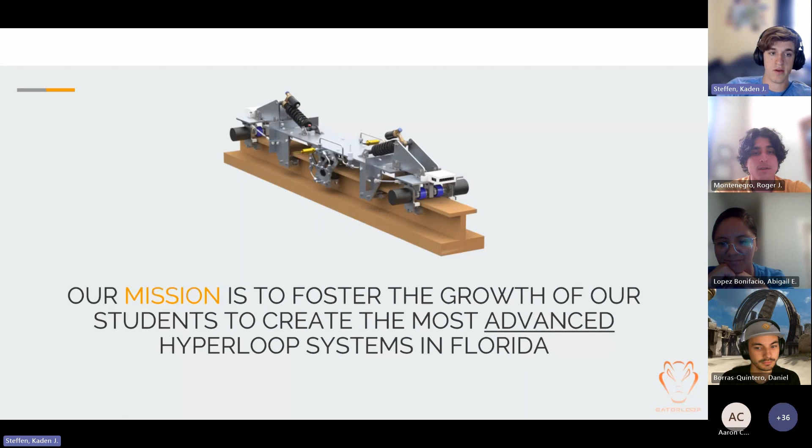I'm the Brake Sub Team Lead, and we're gonna give you a rundown of our previous version of our pod, TinyPod, which we are wrapping up. Like I said, we'll give you a quick overview and then progress on our electrical subsystem, and then we'll also give an insight into our next project that we're working on, which is upscaling this previous version of the pod.

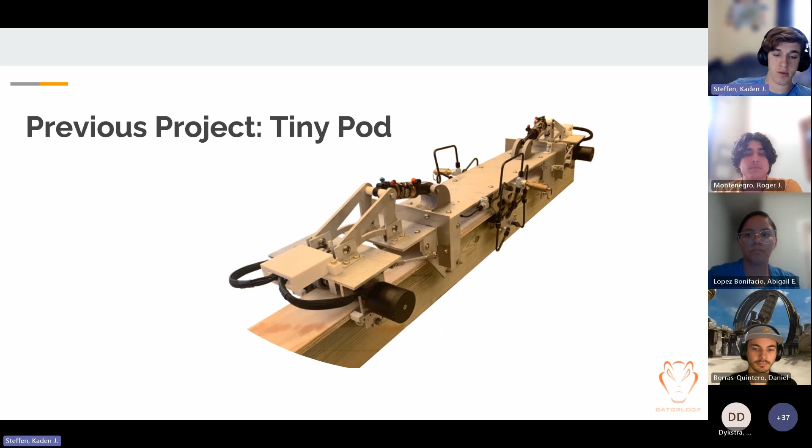So we will start off with our mechanical subsystems, and first off, powertrain. Hi, so I'm Daniel Borras. I am powertrain sub-team lead, and the previous generation what we had was basically just a brushless motor with a wheel to propel the system. So as you can see in the CADs above, you can see the general structure of how we designed the powertrain subsystem. And then you could actually see the brushless motors with the wheels attached to it. So that's the main system that we had to propel it.

So to make sure that the wheels were always in contact, we also made sure to add what we decided to call a constant friction applier. So what we call the under friction system, which you could see the little wheels with the spring system there. What it basically did is make sure that the wheels that were actually being propelled by the motor were always under constant contact with the I-beam. So it always kept that pressure to make sure that we always had that constant friction so we wouldn't slide uncontrollably.

Another thing that we also decided to do is that instead of just using the two motors, we actually had a 4x4 propulsion system, which inherently provided a more stable system for the entire pod and allowed us to accelerate much more quickly while also keeping that stability of the system. We could also actively play around with the speed or the current for each motor, so we could also kind of play around with stability in that sense. But this is basically the overarching idea of what we had for the propulsion system last year.

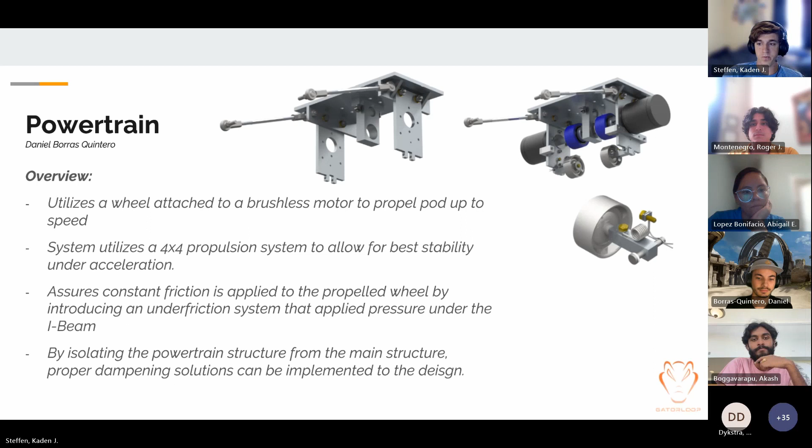Hi, I'm Roger Montenegro. I'm the stability sub-team lead. So here's a breakdown of the lateral and vertical suspension system for TinyPod. So I'll start with the lateral, which are the two top pictures right there. And we utilized an extension spring system with a pivot control arm to ensure that the TinyPod was centered on the I-beam throughout its travel. And as you can see on the left, we used FEA to try to optimize the design, but there was not much to improve there.

Now with the vertical suspension system, as Daniel mentioned, we had the powertrain motor and wheels separate from the main structure. So we utilized, again, a pivot control arm with a shock paired with that to be able to dampen out any forces or vibrations that may occur throughout its travel. And one thing that isn't really noted here is that the final product for the pivot control arms for the vertical suspension system ended up having less material towards the middle after utilizing some FEA on the structure to make sure that we were using the least amount of material. But that was basically the basic concepts that we tried to use on TinyPod's suspension system.

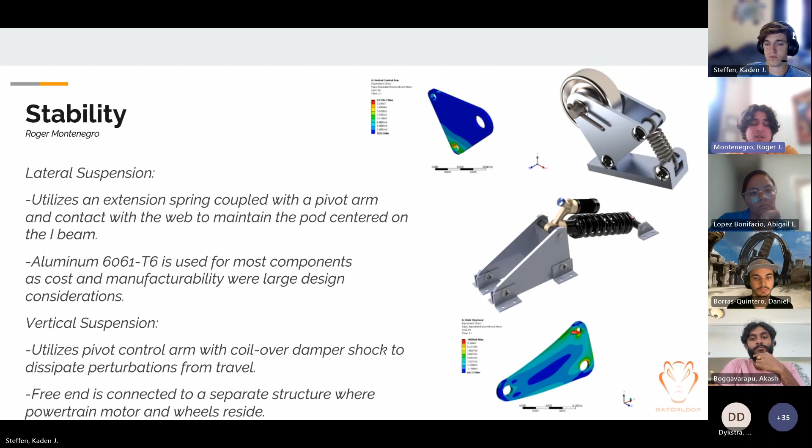Our next subsystem is brakes. So I'm Caden Steffen. I am the brake sub-team lead. Basic overview of our braking system, which you can see there on the right. It's a pneumatic braking system that utilizes a paintball tank that is housed on the top of TinyPod. We used a flange braking design with two brake pads on each side that you can see up in the top right image.

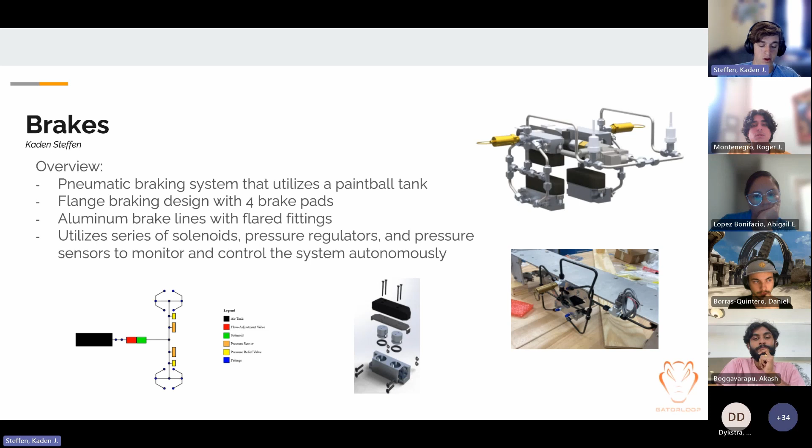The brake system itself utilized aluminum brake lines with flared fittings, and we have a series of solenoids, pressure sensors, pressure relief valves, and other various fittings, which basically allow us to monitor the pressure of our system and autonomously control it through our electrical subsystem, which we will dive into later. So I'll pass it off to structures.

Yeah, so I'm Abigail. I'm the structures lead for Gatorloop. So for TinyPod, the dimensions were just 3.5 feet times 7 inches and then 0.25 inches. The main material was aluminum, and it was just basically different plates bolted together. So really all the manufacturing processes were just milling, drilling, and a lot of the plates were made using the water jet in the university.

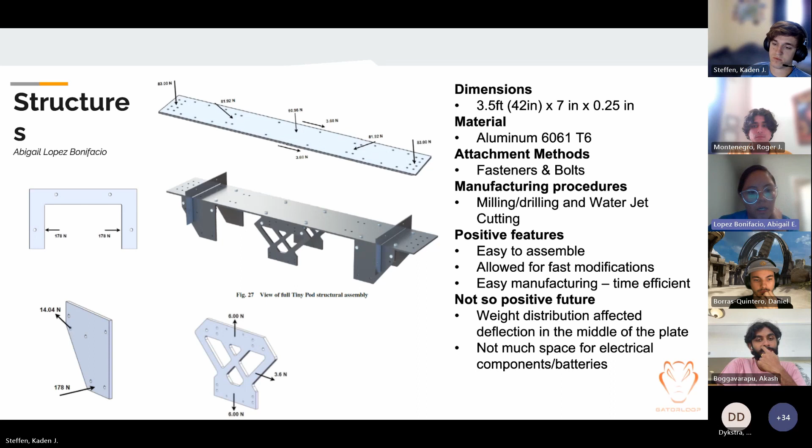The good things of TinyPod is that it was really easy to assemble. It allowed for really fast modifications, and especially regarding manufacturing time, it was fast. The not so good things is that there was not much space for some of the electrical components, and that the weight distribution was affecting the deflection of the middle plate. But yeah, that's it. All right, we'll jump into our electrical subsystems now for TinyPod.

Hello, my name is Devin Dykstra. I'm the Sensor and Systems lead. I'll be talking for Antonio because he was not able to make it.

Our battery system uses 2 separate packs made up of 41 individual cells. The main one is 10S4P for the motors and the high power systems, and then the rest of the electronics run off of a single battery, just 1S1P, which is plenty for controlling the computers and the wireless communications stuff.

The first version of our pack, as you can see pictured on the right, is just connected via copper foil, and I know this is not standard practice because it does limit how much current we can pull from it, but it does allow us to test things and very easily reconfigure the pack. Mathematically, we did check that out to run safely at 20 amps. It can probably do more, but we're limiting it to 20 amps.

And the next steps would be to actually mount it to the pod and integrate a BMS for safe operation during when we're actually driving.

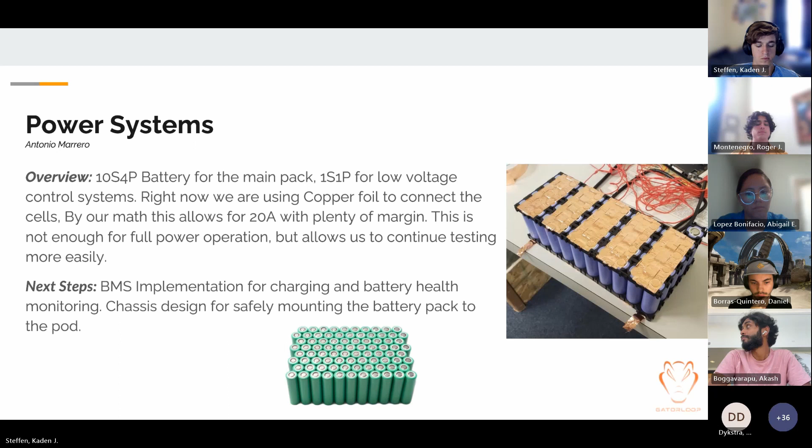Okay, and then sensor and systems, which is my actual subteam. We take a variety of sensor inputs into a Teensy 4.1 microcontroller, and then control the motors, solenoids, and LEDs appropriately. So we use an HC12 chip for the wireless module, which is a 400 megahertz transmitter. It's very low power, which means we can put it pretty much anywhere. And then also, since it's 400 megahertz, we're sacrificing transport speed for range, which is a good trade-off in our opinion, because we're not sending that much data, it's just telemetry.

And then also we have a logging system on board. So we have an SD card that we're just constantly writing to. So if anything does go wrong at any point, we're not relying exclusively on the wireless communication to log things. We also have local logging.

So what other sensors do we have? 2 pressure sensors for the braking system. The VESC, we're using that VESC just because it's a very well-documented standard for the speed controllers. It gives a bunch of data on the temperature of the motors, the speed, the power going through it, all that.

We're using an IMU to verify that the pod is actually moving how it's supposed to, so whether the acceleration matches our motor inputs, and of course if there's any lateral movement that exceeds our thresholds, then we automatically shut off and go to an emergency state. And then the ground station is just a computer with UART commands, an e-stop and a dial to control the speed. So yeah, that's the sensor systems.

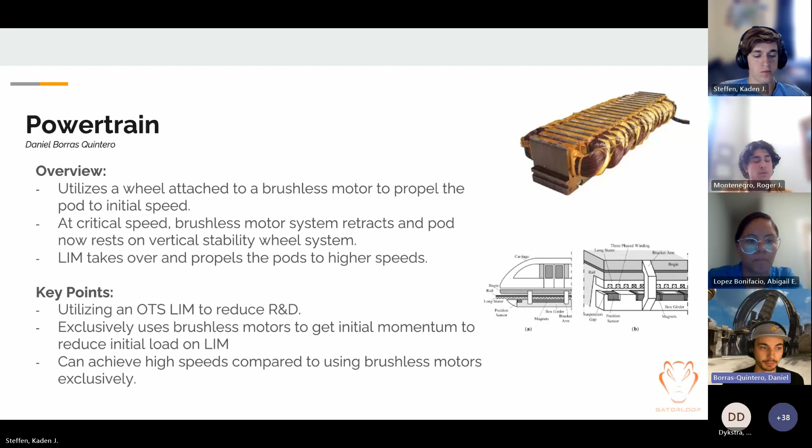So we're mainly focusing on using off-the-shelf LIM components to reduce R&D that we might need. So we're mainly looking at using an H2W high-tech LIM that they're offering, and we've been communicating with them, getting some research and documentation that they have for us to basically avoid that extra R&D, as I previously mentioned, and just generally trying to figure out how best to approach the structural problem of retracting the brushless motor train while it's still under load. So we could go on to the next page.

So what we currently have progress-wise is we've actually reviewed the horizontal vertical stability, the linear induction motor mounting system, and the lower structure sandwich, as well as the brushless motor propulsion system. We've done all the system requirement reviews, just trying to figure out what are the main objectives that we have to do for the actual project to work. And then we moved on to actually doing a decision matrix, figuring out which idea, which approach is most appropriate to actually meet those requirements that we have for that task.

So as for decision matrix review, we've already covered the horizontal vertical stability, LIM mounting, as well as brushless propulsion system. So all those teams are already moving on to the design phase, being headed by 2 or 3 engineers for each division. So hopefully we should have a final CAD model sometime around January to early February, which we'd be more than happy to show at that time. But yeah, that's current progress with powertrain.

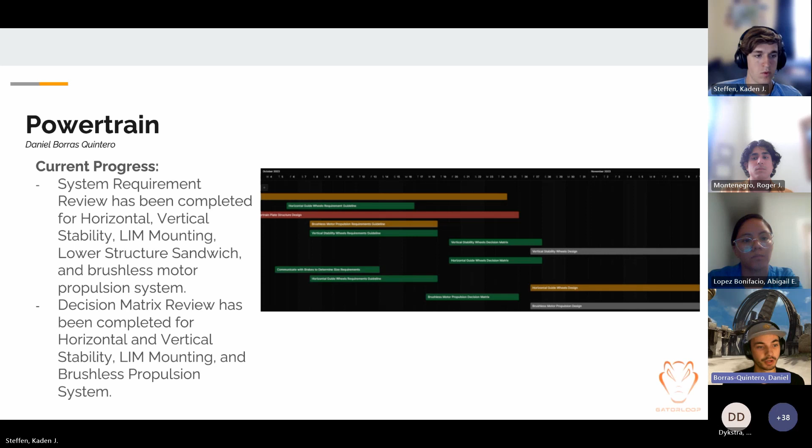So for stability, as Daniel mentioned, we have some new requirements with the LIM being implemented, especially for the vertical suspension. So for the lateral, we decided that it performed very well for TinyPod, and we can have a similar structure in terms of what type of concepts and designs we can apply for the lateral to maintain it centered on the I-beam. But for the vertical suspension, with having to have a certain clearance for the LIM at all moments, we are going with an approach similar to the top picture and the top right, and making sure that we can always have a certain amount of distance between the LIM and the track.

So right now we're currently focusing on researching and developing something that could allow for that to happen at all times. We're spending a lot of time collaborating with the powertrain sub-team to ensure that we can implement our stability system with their system as well. So as previously mentioned for TinyPod, it was separate. This time, everything will be together into one structure. So we are spending a lot of time working on how we can implement things together and not have it separate as last time. And most of our research has been around how motorcycles set up their suspension systems, as it is a similar design this time compared to what was done last time.

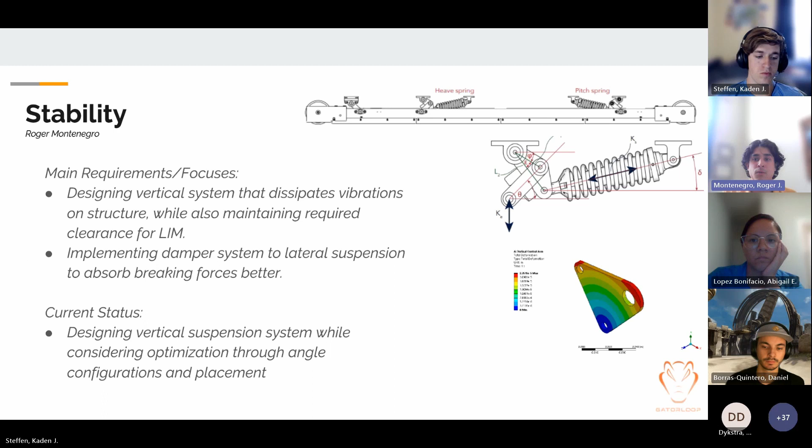But other than that, we are starting the CAD for the vertical suspension system and allowing other engineers to work on the lateral suspension system and trying to redesign it to have similar concepts, but just be a bigger version to be able to sustain the larger braking forces that will be present for a medium pod.

Sweet. Yeah, so moving on to brakes. So quick overview. The new braking system actually began designing 6 months ago. During manufacturing of our TinyPod braking system, we realized we had a lot of reliability issues and some issues with actually the effectiveness of the braking system. So we got a head start on redesigning our braking system, which you can see on the right.

So this new braking system, it is still a pneumatic braking system that utilizes the same paintball tank, but this time we designed the system to brake on the web of the I-beam. We did this because, one, it would allow us to utilize less brake housings, and also by braking on the web, we figured it'd create more stability for the pod. Like I said, with the reliability before, when we were braking on the flange, sometimes we'd have more applied force from the top brake pad than the bottom, which made some instability issues with the pod. This new system also utilizes copper brake lines and Yor-Lok fittings, which are just easier to assemble and manufacture.

And it utilizes the same solenoids, pressure regulators, and pressure sensors as before to control the system. So the key differences between the two designs, which the new one's on the top right and the old one is on the bottom right, is that this time the brake force is being applied by a spring instead of the pneumatics itself. So previously we used the pneumatics to extend the brake pad and brake the pod. This time we're using the spring to brake the pod and the pneumatics to actually retract it.

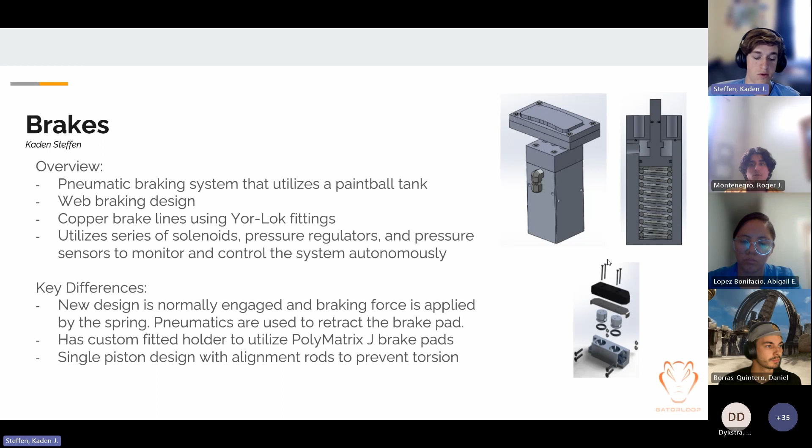And then also what we did is we adopted a single piston design, which basically simplifies the geometry of the brake housing, and we added two torsional rods, which prevents torsion of the brake pads, whereas before we just used two different pistons, which we had some reliability issues with. So as far as the progress of our system, we've actually fully assembled and tested one of these brake housings over on the right here.

And we've got some numbers for operating pressure and our estimated brake forces and frictional forces, which once we get a mass of the new pod, hopefully equates to a braking deceleration of around 1G, which was our goal when designing this. And yeah, as far as long-term innovations, once we complete this new iteration of the basic pneumatic system, we have started some research on eddy current braking.

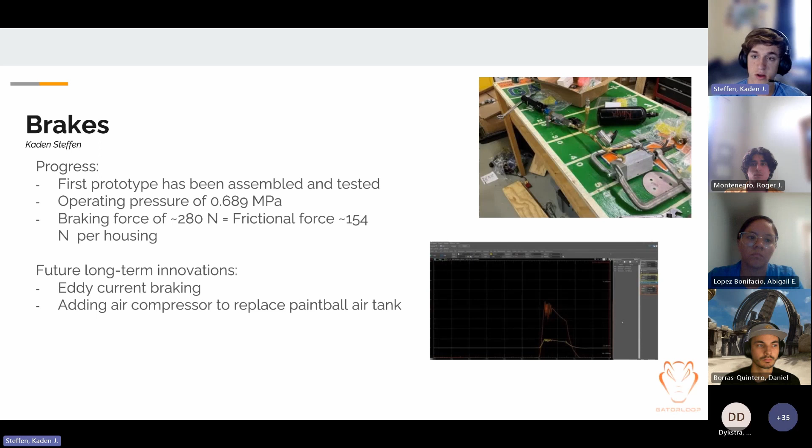And if we decide that there is enough room and capability on this new pod, we have considered adding an air compressor to replace the paintball air tanks. So that way our system could basically run forever, theoretically. Pass it on to structures.

So for structures, as we are scaling up the pod, it's not feasible to have a solid plate on top because it's a lot of weight. So instead, we have decided to just use frames and have a lot of hollow spaces. Right now, the frame is made of aluminum, and we just have a bunch of attachments for the other subsystems.

However, we are trying to do some research on carbon fiber composites to replace some of the plates and attachments that we have right now in the pod, and to replace them with carbon fiber plates to make the whole pod more lightweight. And then we have two levels. The first level is the main level where most of the subsystems are attached with the frame, and then we have a second level which is just made out of carbon fiber, where some of the extra electronics are gonna go, or just extra things.

And then for the aeroshell, we're still doing research on the aerodynamics and which tools and software we have to use for that. So that's a work in progress. And we're just doing a lot of research on how to manufacture, how to incorporate the carbon fiber composites together with some metals, especially for bolting some of the parts. Yeah, so those are the main changes.

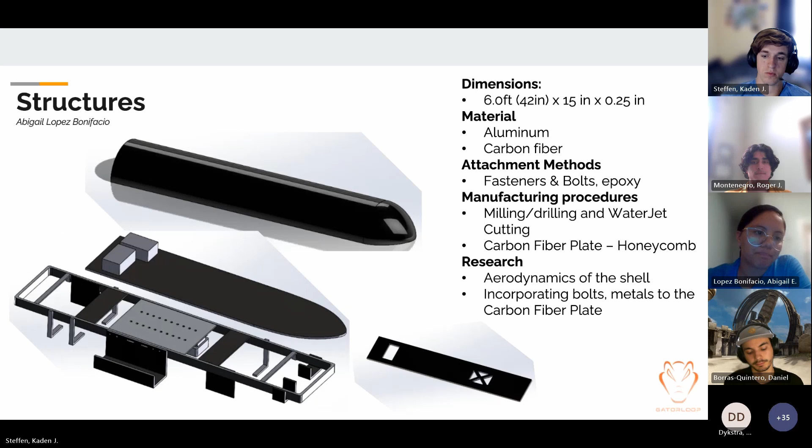Sweet. So that covers everything from us. Hope you guys enjoyed, and we are now open to questions. Yeah, thank you, Gatorloop, for a really great presentation. So again, if there's any questions, you can raise your hand.

From Alex, how have you found your pressure loss due to leaks with these new fittings? Would you guys like to answer that question? Yeah, I can answer that real quick. So previously with our flare fittings, we found that it was super inconsistent when we mounted them, because you had to basically mount them straight on. And we had a lot of pressure leakage with that system.

But with our new system, during full engagement or full retraction, we have a lot less leakage, and we're able to basically sustain our brakes being open for around a minute at this point. So there is still some pressure loss, but we're operating at such a low pressure that our air tank will be able to sustain for 2 to 3 hours. So yeah, the new fittings are doing a lot better.

We have more follow-up from Alex, other Alex. And what pressure did you say your air tank was at? Yeah, so our air tank stores up to, sorry, doing the unit conversions right now. So our operating pressure is about 0.7 megapascals, and our air tank stores up to 27.6 megapascals. So yeah, that's just the specs on those.